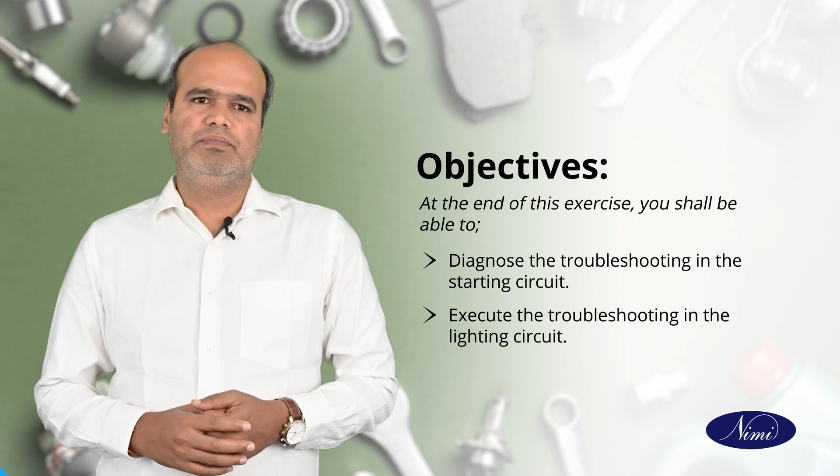Tools, equipments and materials required: a vehicle in running condition, trainee's toolkit, multimeter, cotton waste, magnetic switch, petroleum jelly, brush, and vernier caliper.

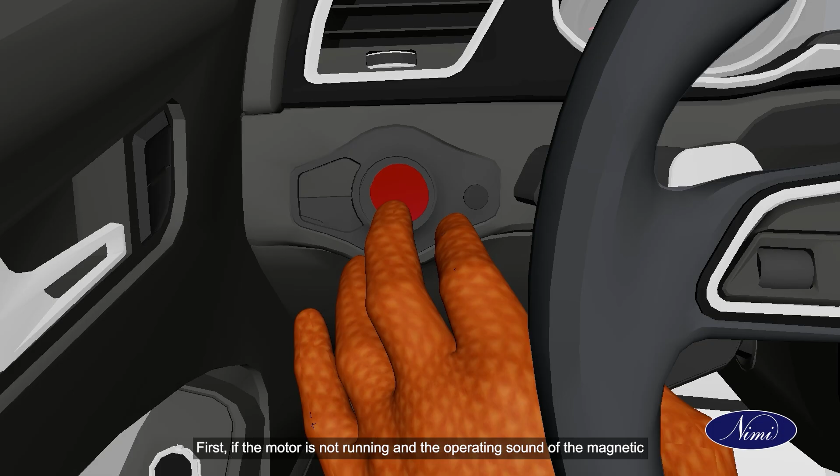Let's start this session by performing the troubleshooting in the starting circuit. We will discuss some of the conditions, their possible causes, and corrections. First, if the motor is not running and the operating sound of the magnetic switch is not heard, the first possible cause is the battery may have discharged. For this condition, we need to recharge the battery.

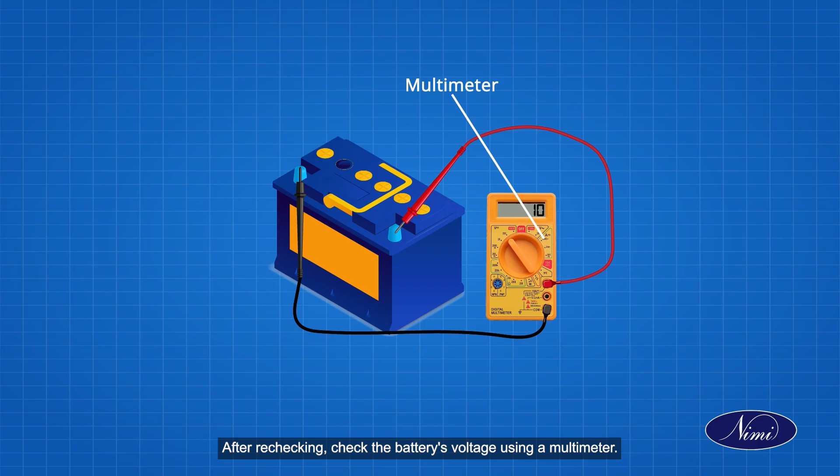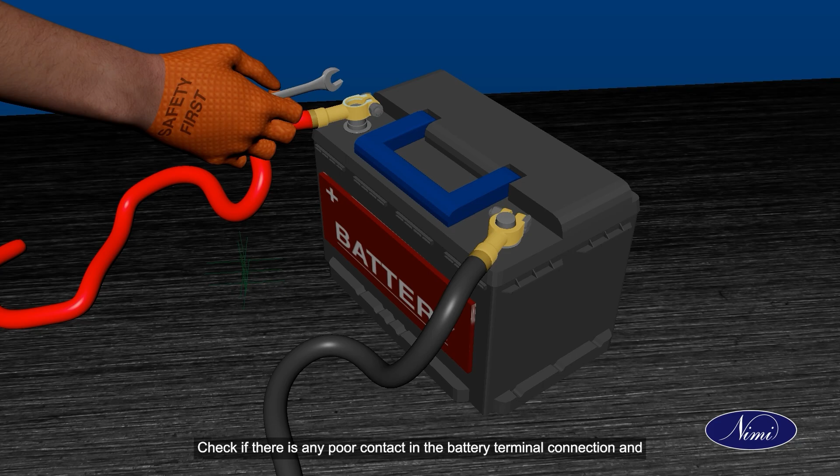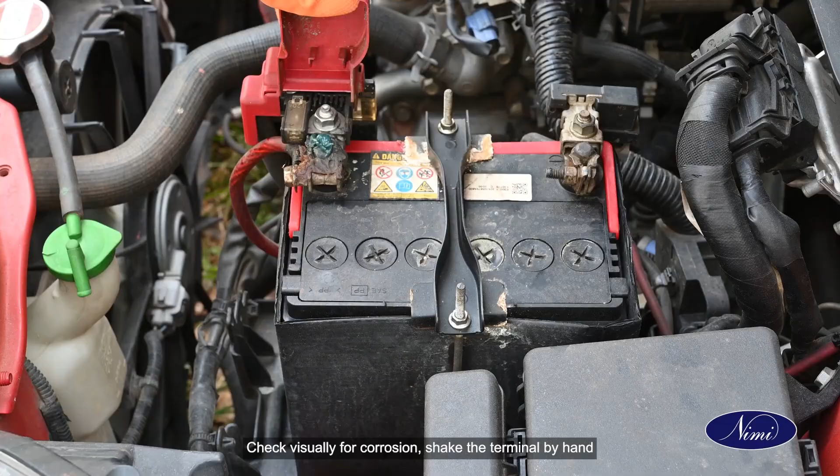After recharging, check the battery's voltage using a multimeter. If the battery's voltage is less than 10, which is too low due to battery deterioration, we need to change the battery. Check if there is any poor contact in the battery terminal connection and retighten or replace the battery terminal. Check visually for corrosion. Shake the terminal by hand and check for proper contact.

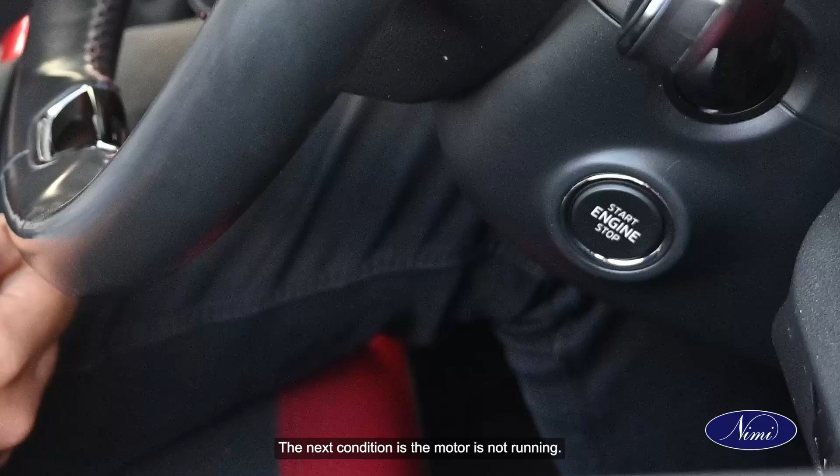The next condition is the motor is not running, but the operating sound of the magnetic switch is heard. In this condition, the starting motor is running but too slow because of smaller torque. As discussed earlier, check the battery and wiring. If it is satisfactory, then start inspecting the starting motor.

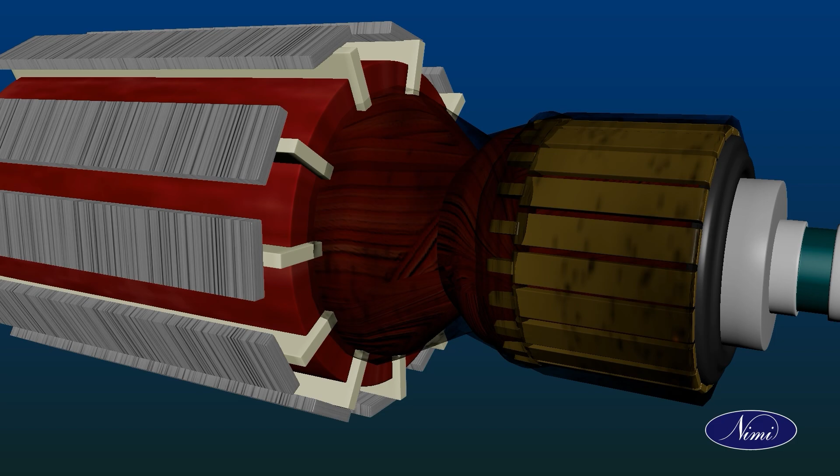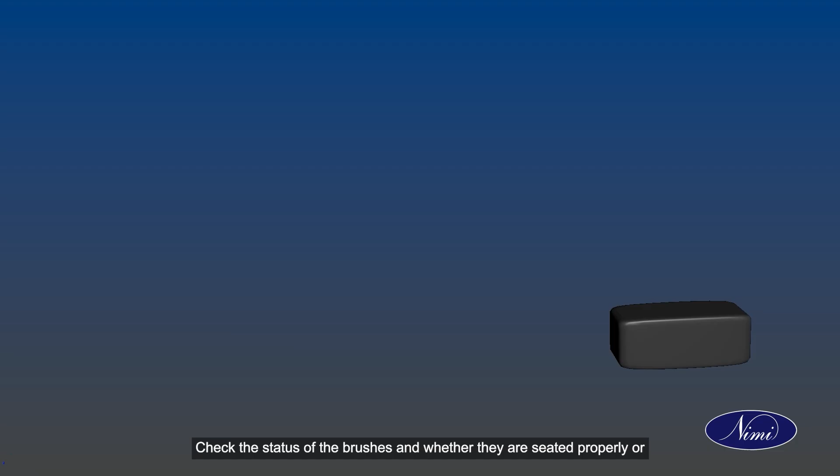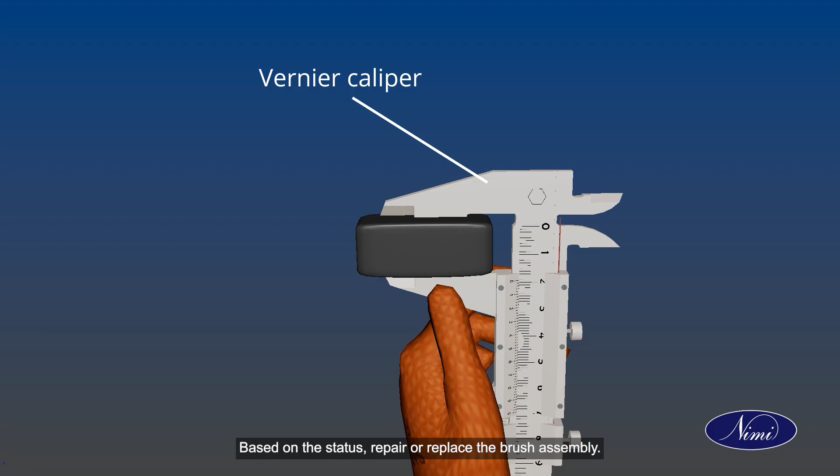Check the brush spring. If it is weakened, it can be replaced or repaired. Check the status of the brushes and whether they are seated properly, worn out, or the spring got weakened. Based on the status, repair or replace the brush assembly.

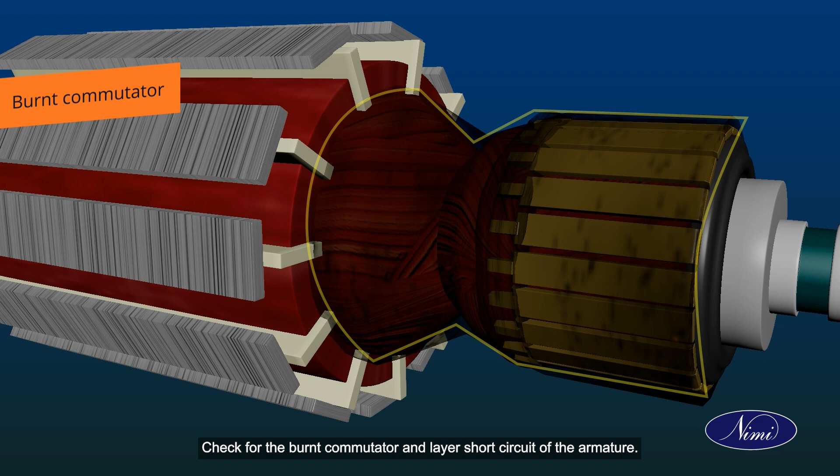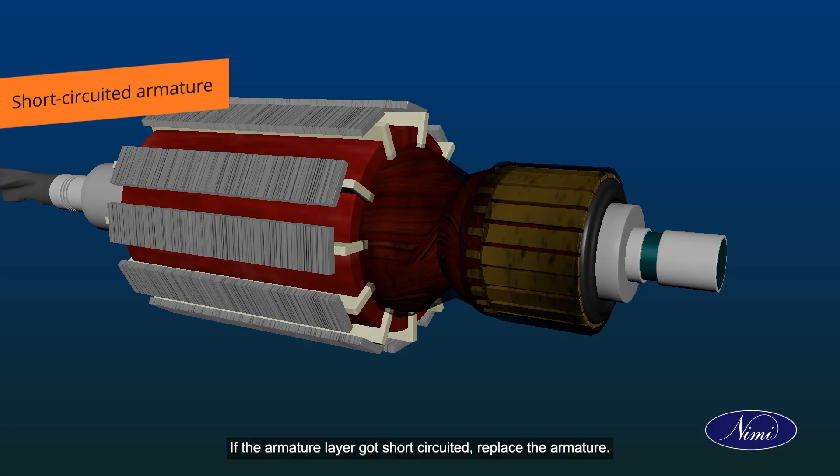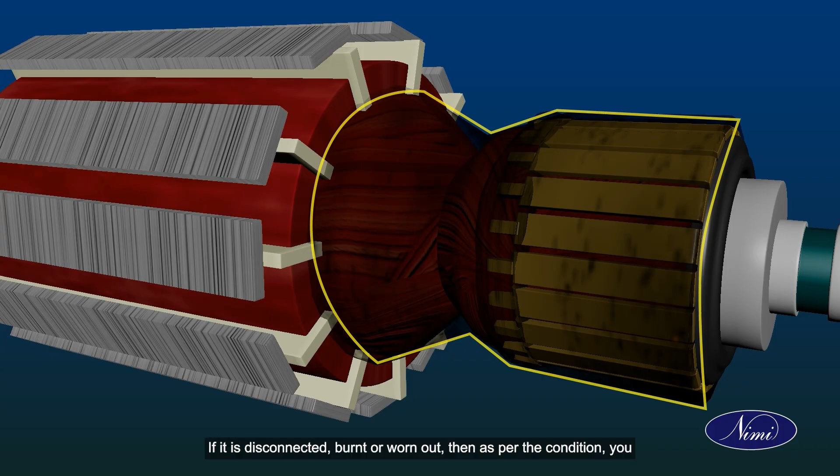Check for the burnt commutator and layer short circuit of the armature. For both problems, we need to replace the armature. If the armature layer got short circuited, replace the armature. If it is disconnected, burnt, or worn out, then as per the condition, you may repair or replace the armature.

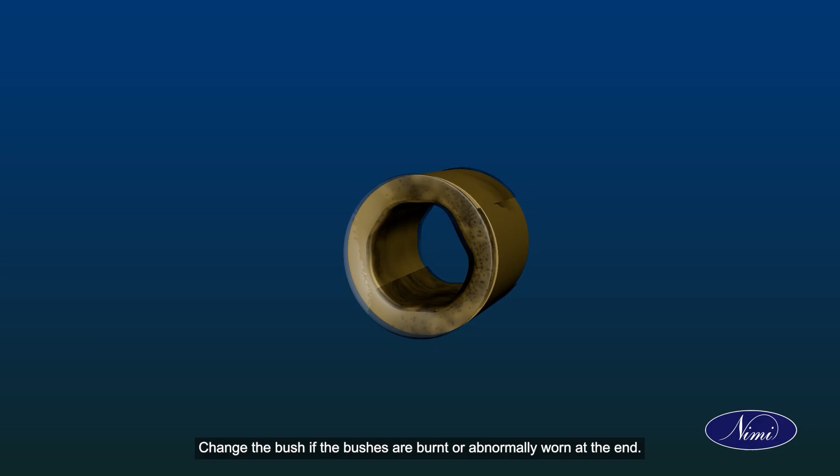After checking the armature, now let's move to bushes. Change the bush if the bushes are burnt or abnormally worn at the end, and replace the brush assembly if the brush is worn.

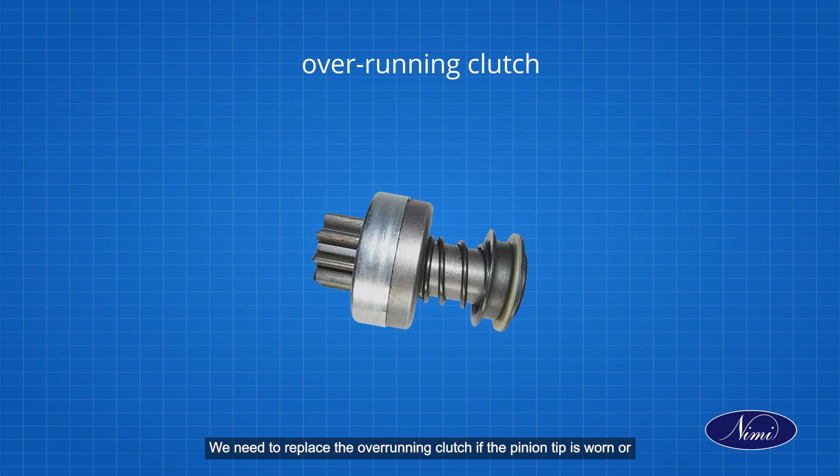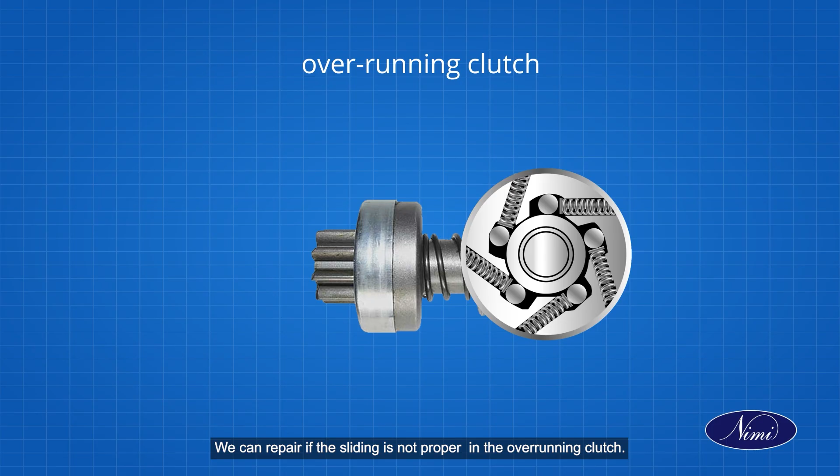The next condition is the starting motor is running but not cranking. We need to replace the overrunning clutch if the pinion tip is worn or the overrunning clutch is slipping. We can repair if the sliding is not proper in the overrunning clutch. Replace the flywheel if the ring gear teeth are worn.

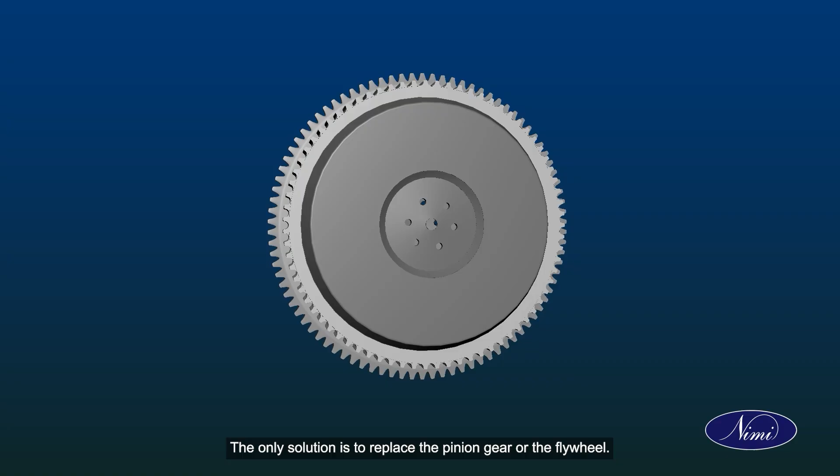The last one will be the noise issue. Noise may occur due to abnormally worn bush, so replace it. The noise may also occur due to the worn pinion or worn teeth of the ring gear. The only solution is to replace the pinion gear or the flywheel.

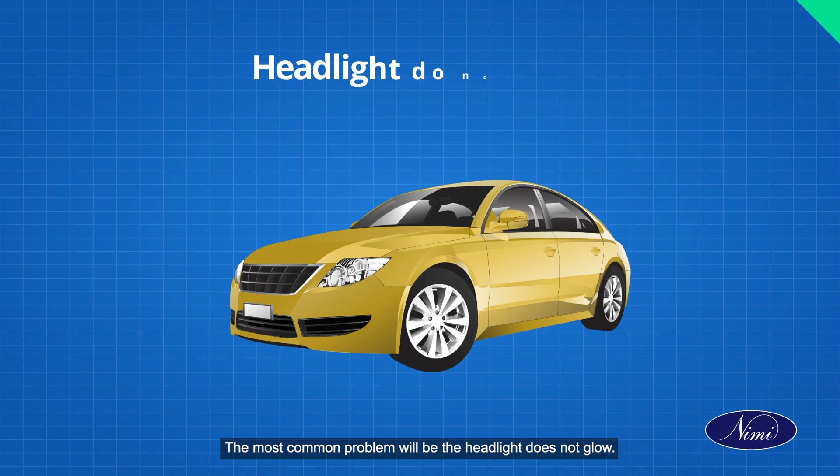The next topic that we are going to discuss is troubleshooting the light circuit. The most common problem will be the headlight does not glow. The cause may be the headlight circuit fuse. If the fuse is gone, replace it.

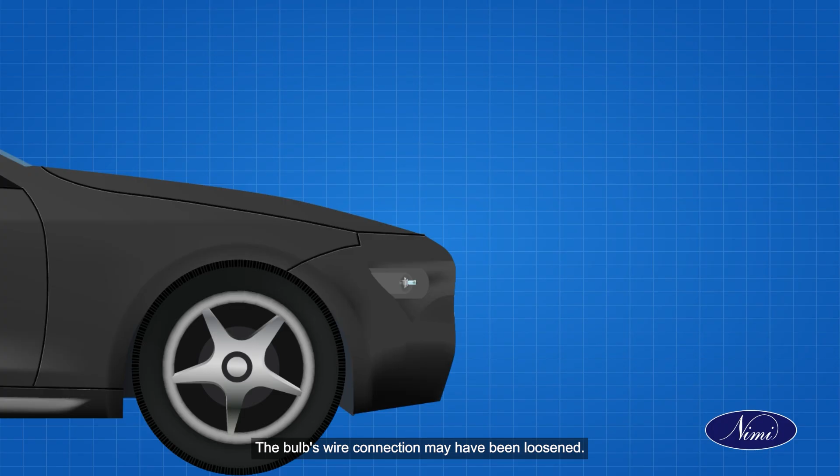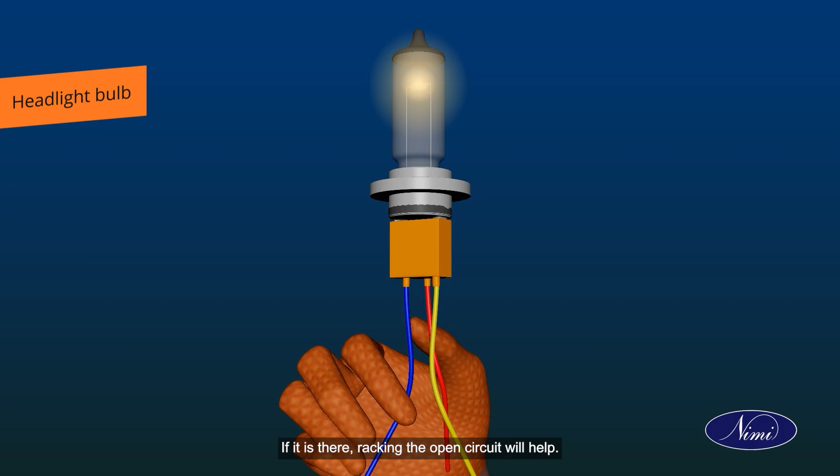The bulb's wire connection may have loosened. We can fix this issue by tightening it. There may be an open circuit in the wiring. If it is there, tracing the open circuit will help. The filament of the headlight bulb may have burnt out; replace the bulb in that situation. Change the switch if the headlight switch is defective.

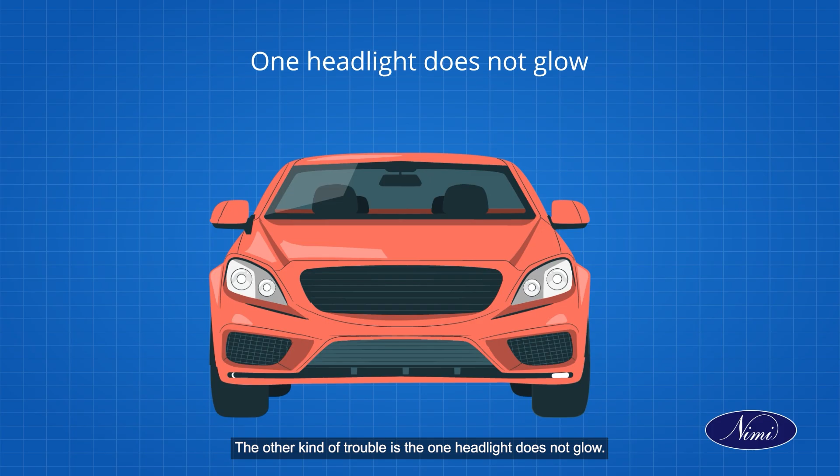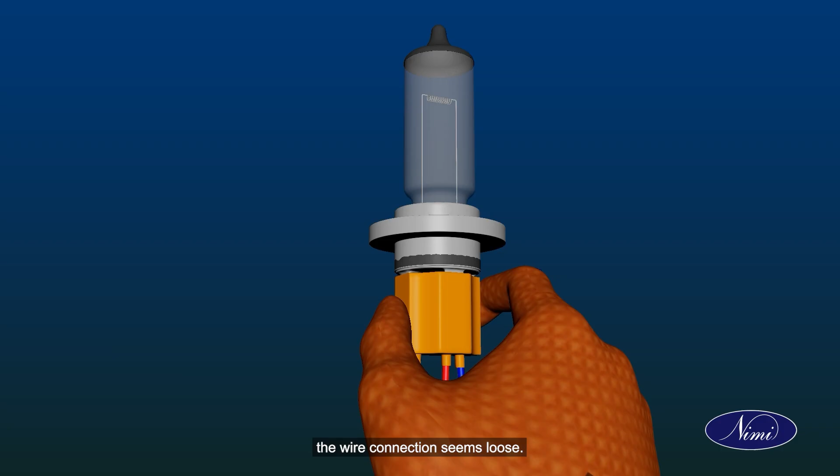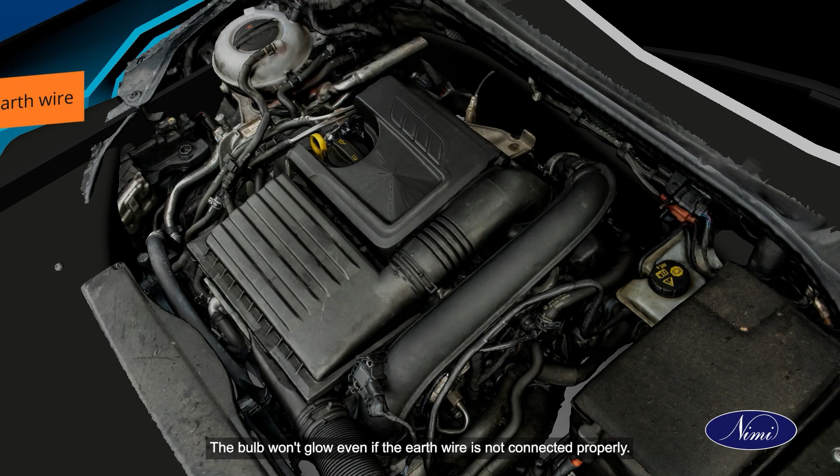The other kind of trouble is one headlight does not glow. The causes and remedies for these are: tighten the connection if the wire connection seems loose. If the wire is defective, then change the wire junction box. The bulb won't glow even if the earth wire is not connected properly. So check the earth wire to see whether it is rusted and clean the rust.

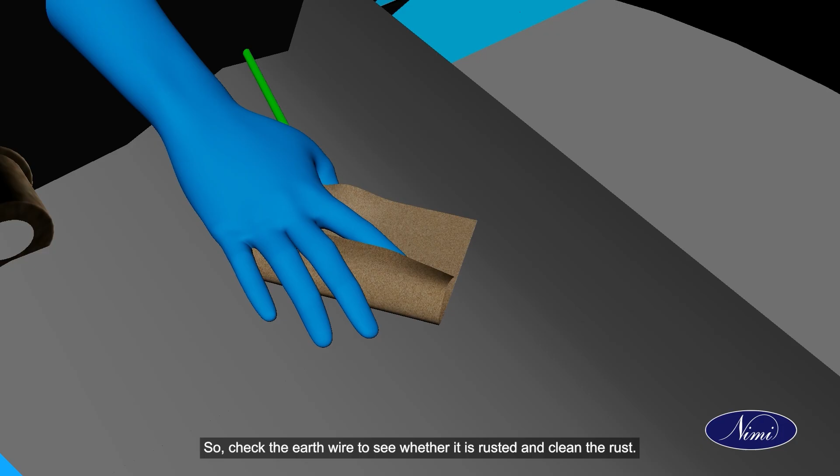The last trouble will be the high or low beam does not work. The bulb holder wire may have a loose connection. If there is any loose connection, then tighten it. Replace the switch if the vehicle's dim and bright switch is defective.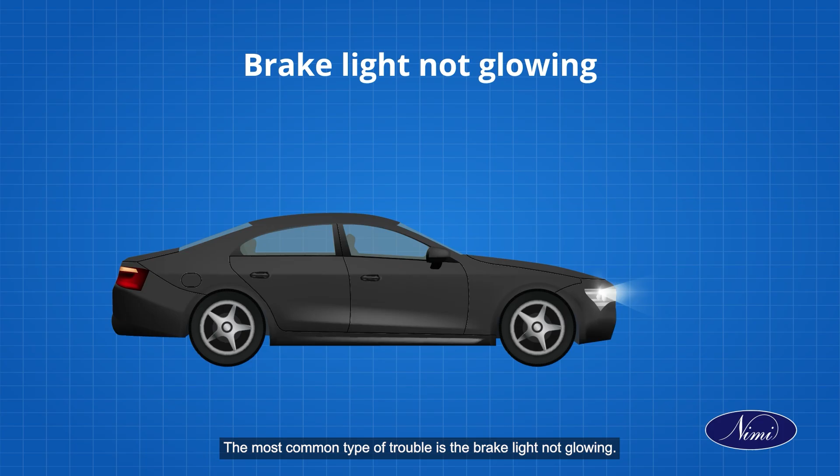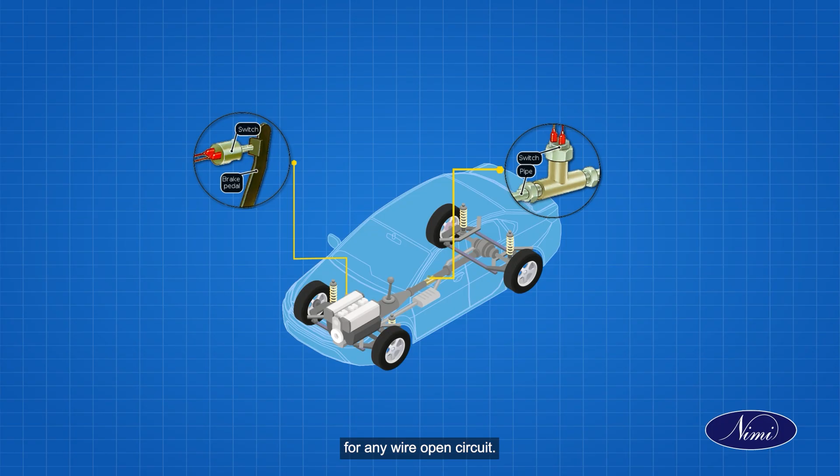The next topic is troubleshooting the brake lighting system. The most common type of trouble is the brake light not glowing. Check whether the bulb is fused and change the bulb if required. After checking the bulb fuse, then check the entire circuit for any wire open circuit. If you find any open circuit, then connect the wire. If that is not possible, then replace the wires.

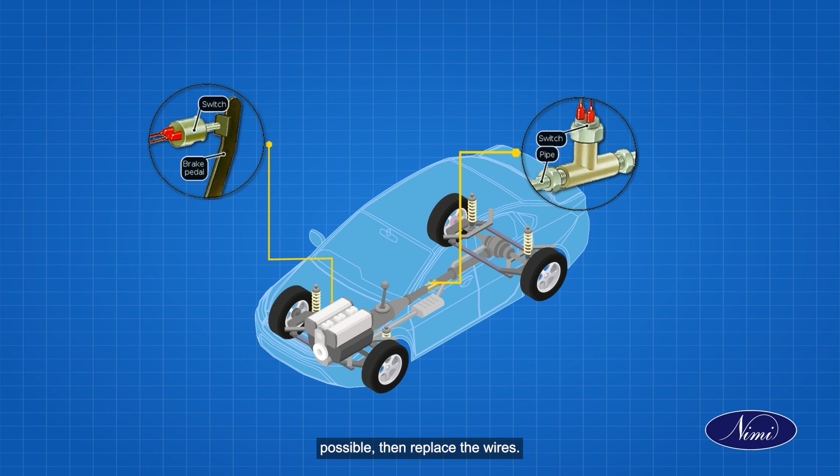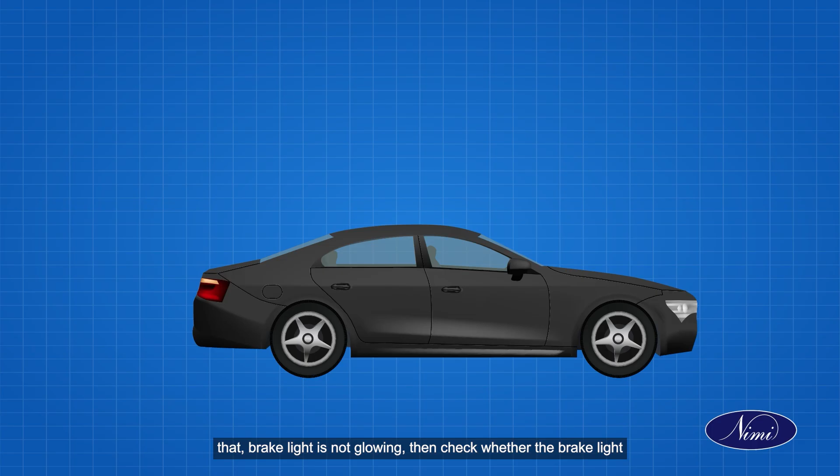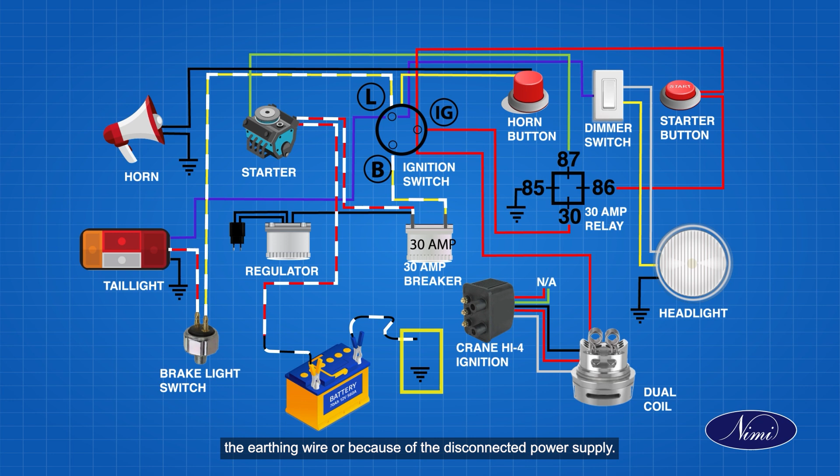If the circuit is fine or repaired and even after that the brake light is not glowing, then check whether the brake light switch is defective and replace it. The next step is to check the power supply to the bulb. The power supply to the bulb can be interrupted because of the earthing wire or because of disconnected power supply. So check the power supply and clean the earthing wire.

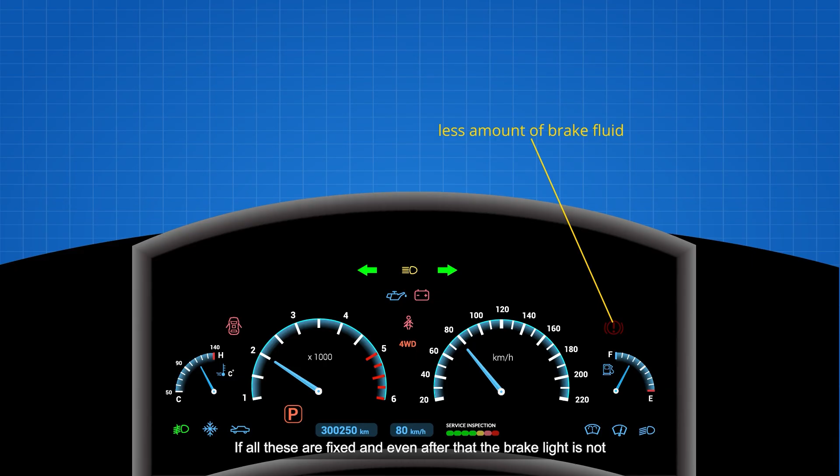If all these are fixed and even after that the brake light is not glowing, then check the master cylinder for the sufficient amount of brake oil and refill the brake oil.

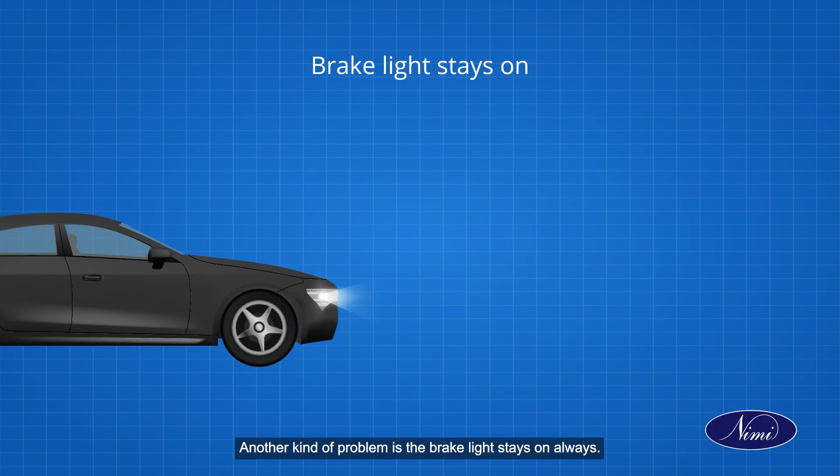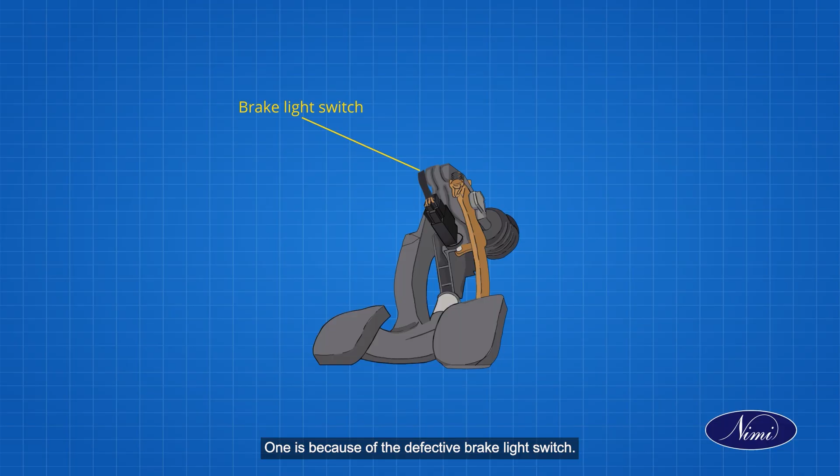Another kind of problem is the brake light stays on always. This will happen only because of two issues. One is because of the defective brake light switch; this can be rectified by changing the switch. Another reason will be due to the wrong wire connection.

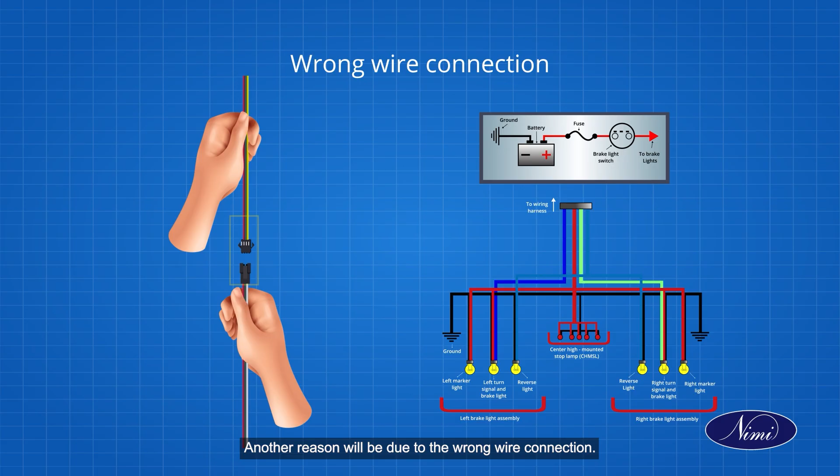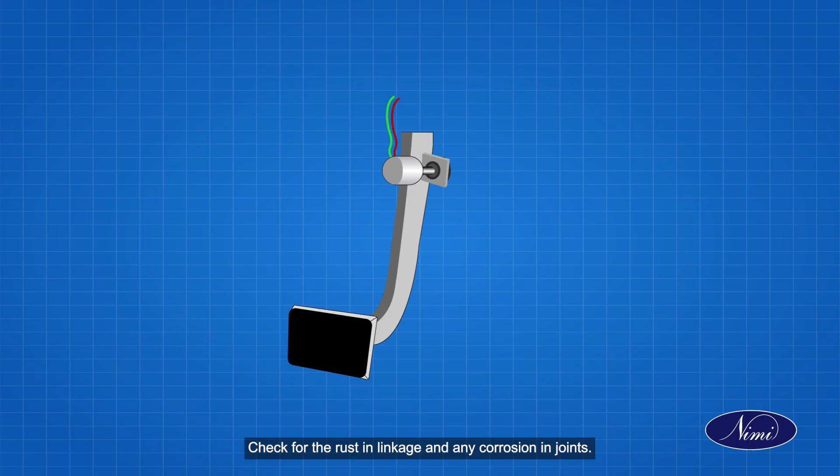The next topic is troubleshooting the brake and parking warning light. Check for the rust in linkage and any corrosion in joints. Change the linkage if it is rusted and lubricate the joints if corrosion occurs. Check the switch is working properly; if it is defective, then change it.

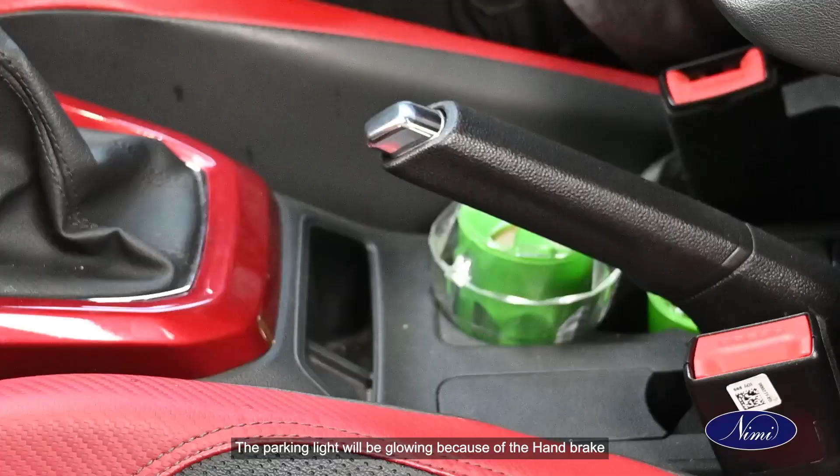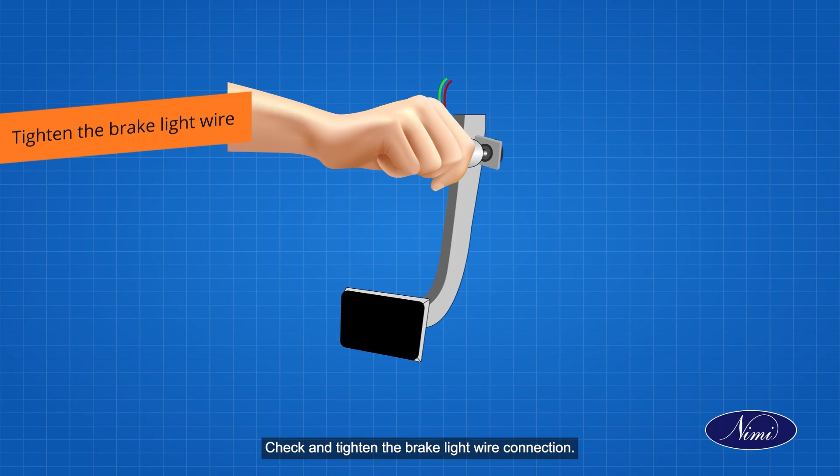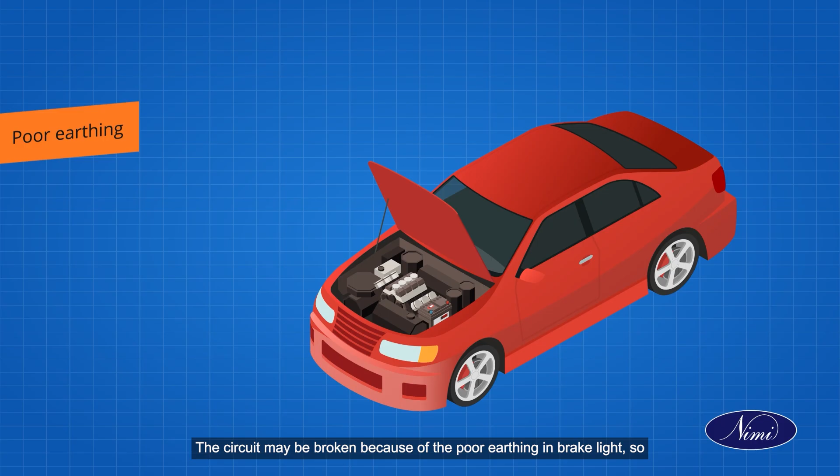The parking light will be glowing because the handbrake lever is not fully released. Check and tighten the brake light wire connection if the wire connection is loose. Check the brake light bulb fuse and change it. The circuit may be broken because of poor earthing in brake light, so clean the earthing wire and refit it.

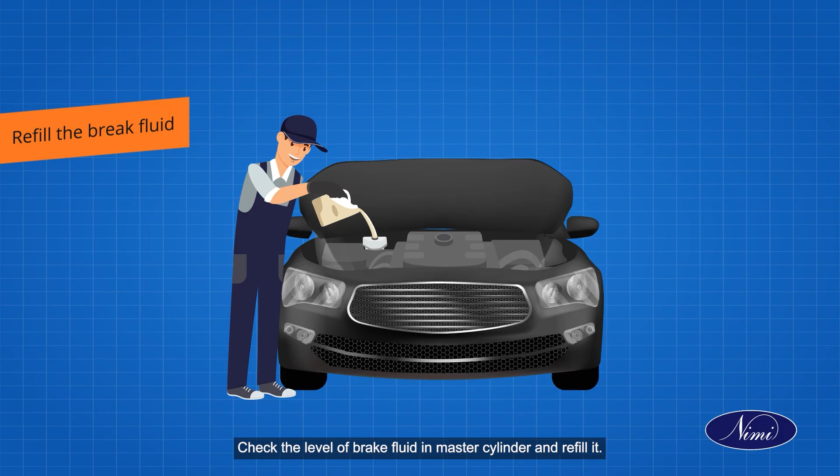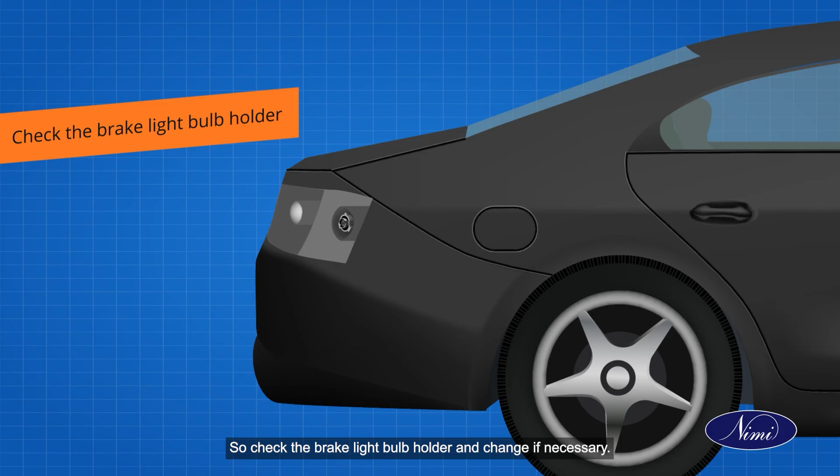Another kind of problem is the brake light stays on always. This will happen only because of two issues. Check the level of brake fluid in the master cylinder and refill it. There is a chance for the bulb holder getting damaged, so check the brake light bulb holder and change if necessary.

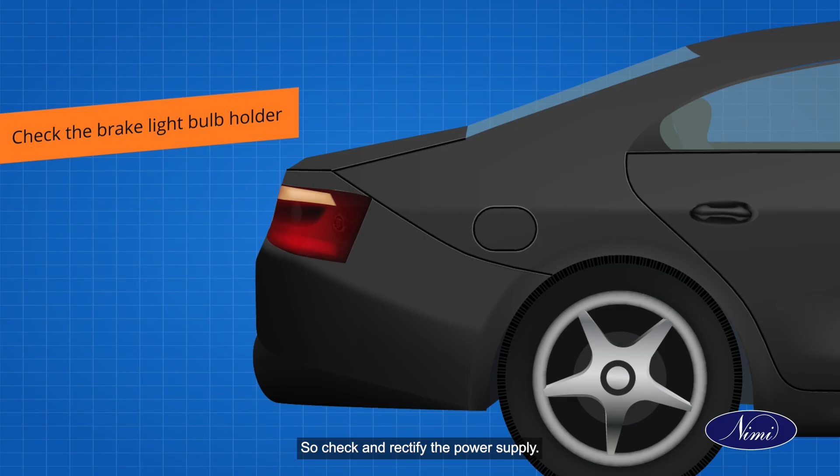The power supply may be defective, so check and rectify the power supply. We also need to check the brake pedal linkage to ensure the pedal linkage is fixed properly. Fix it if it is not proper.

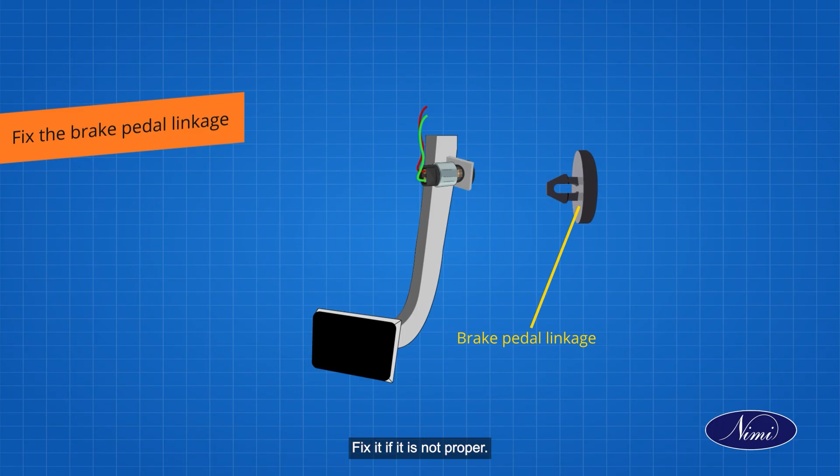There is a higher possibility for the brake light switch getting short circuited. If it is short circuited, replace the switch. Let us summarize this topic on checking circuit using the service manual wiring diagram for troubleshooting.

In this topic, you have learned how to troubleshoot a starting circuit, lighting circuit, brake lighting, and parking warning light system, along with the remedies that can be followed to rectify the issues.